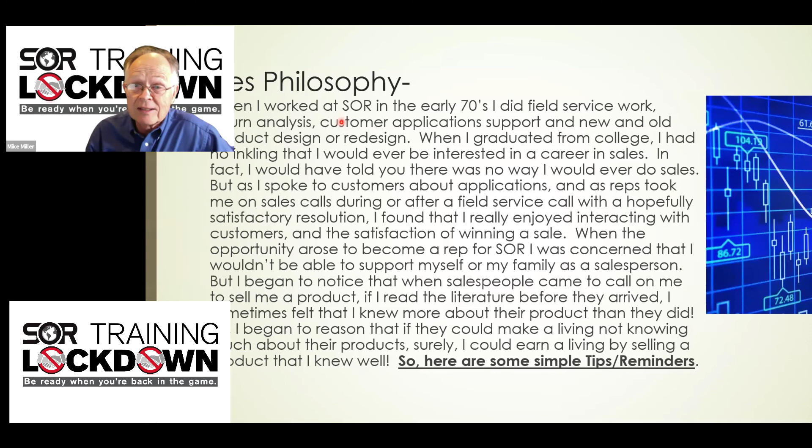So let's see what I did. The first thing I'd like to say is that product confidence is essential. A good technical salesperson knows their product very well, or they know someone else who knows the product really well and who's accessible. Product confidence is as visible to a customer as a forehead tattoo.

It is really obvious. So I gained a hands-on knowledge of these products by reading the literature, practicing with the demos, doing focused selling, sometimes selling the same product for a full week or maybe even a whole month, until I felt like I'd heard every question and could answer every question. I unashamedly copied presentations from product experts, and I learned by helping to fix or solve customers' problems with these products.

So the process of learning a product well and discussing it with customers leads to an additional benefit, which is application knowledge. So knowing where a customer needs a product and touching on these needs or the benefits of using your product in an application where I know we work better than anyone else pretty quickly gives the customer a sense that you are or you could be a valuable asset in their career and that time spent with you is a good investment.

So like a good football coach who has a series of plays that always work, we can begin to look at our customer base and start to filter through opportunities and guide customers to sure wins that help them and make us look good. As this occurs more frequently and over an increasingly broad range of customers, we find another benefit, and that is that our ability to communicate to customers and principals gets better and better.

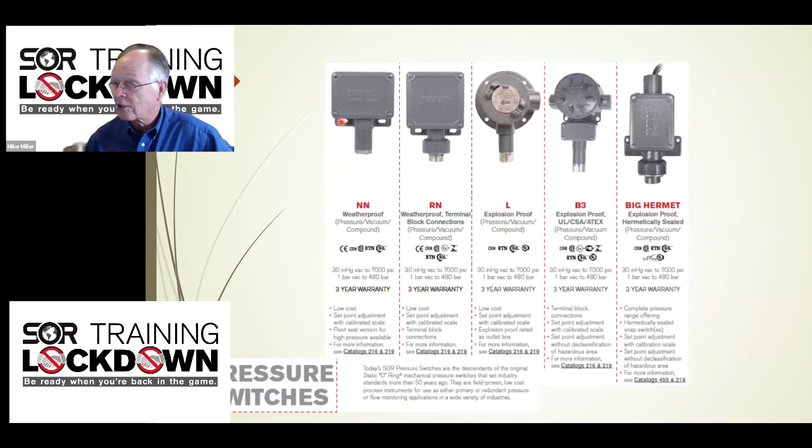We offer weather-tight, explosion-proof, hermetically sealed switches. We offer European-style switches with separate access to set point adjustment without disturbing the electrical enclosures. We offer the mini hermet pressure switches, which are environmentally sealed as well as explosion-proof.

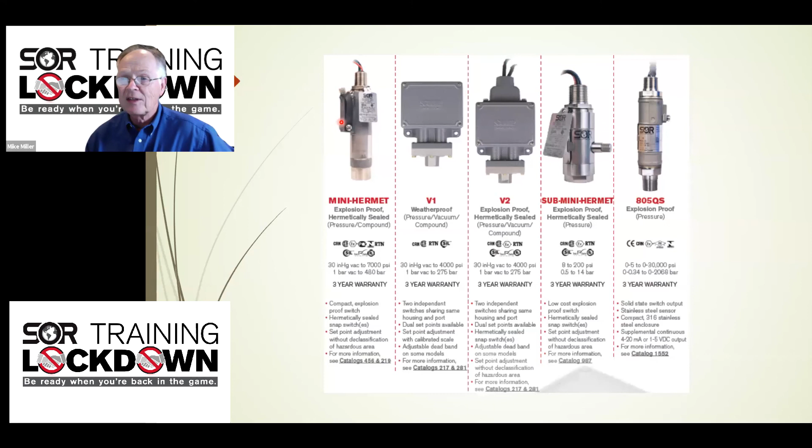We offer dual set point models or models with wide adjustable deadbands in weatherproof and explosion-proof versions. We make the sub-minis for use in areas where you don't have a lot of space. And we make the 805 series solid-state pressure switch products.

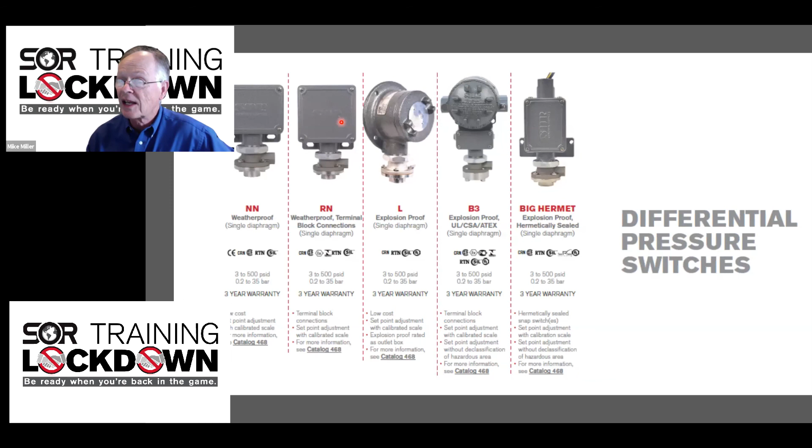We do differential pressure switches with single diaphragms in all the same ranges of configurations. We do the regular pressure switches. And we also do differential pressure switches with dual diaphragms in applications where you need a lot of capability for material compatibility with aggressive media.

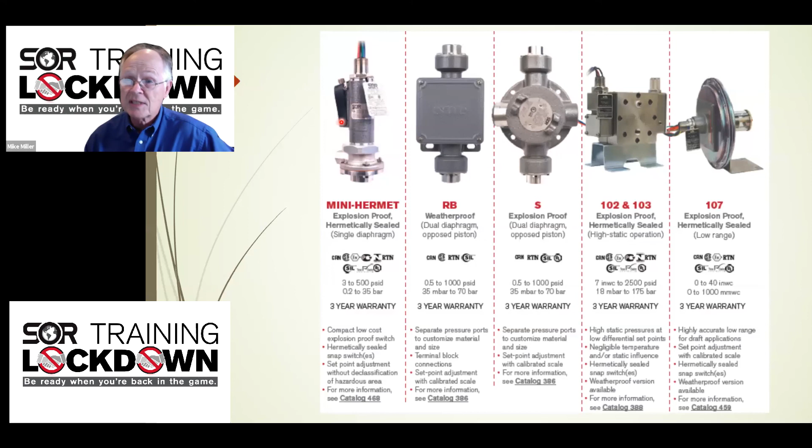The 102 and 103 series switches allow us to detect low differentials at high working pressures. And the 107 switches allow us to detect very low differentials at low working pressures.

The 800, 805, and 815 series transmitters are a very economical and versatile pressure transmitter in an all-stainless steel construction with hermetically sealed innards. The 815s are a very useful combination product that give us the ability to communicate via HART, Modbus, or 4 to 20, and also offer a 1 to 5 volt low power communication opportunity.

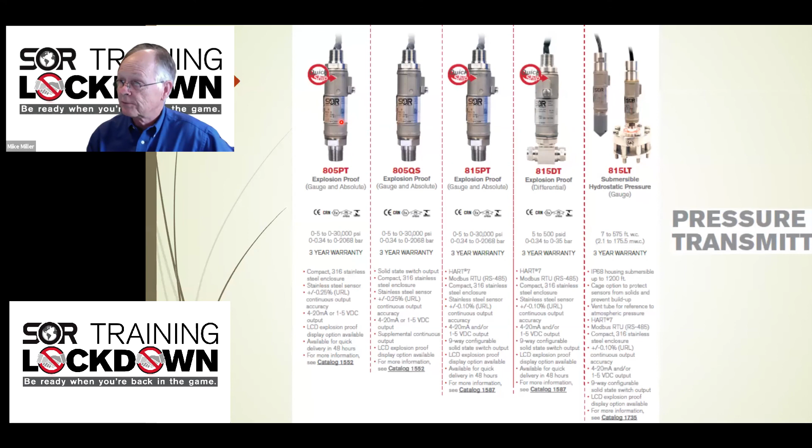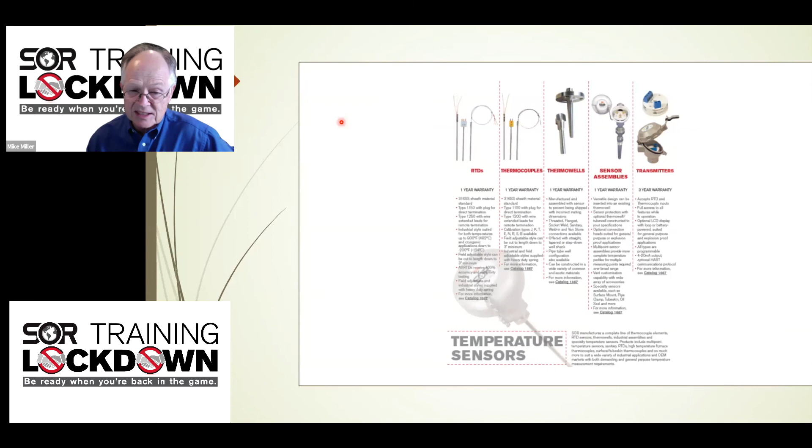And we do differential pressure and submersible pressure. We do temperature switches in the same styles that we do pressure switches. And we do RTDs, thermocouples, thermowells, temperature sensing assemblies, and accessories where electronic temperature measurement is useful.

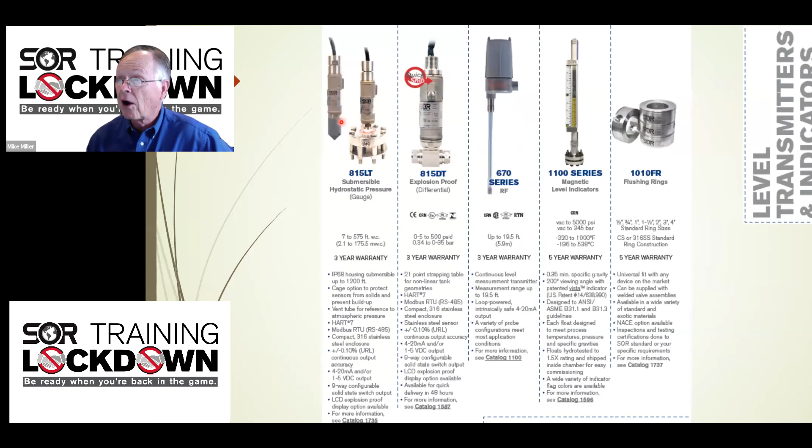We do level measurement using submersible transmitters measuring head pressure. We do electronic differential pressure for level, RF capacitance, magnetically coupled floats, and then we also offer some accessory items like flushing rings. We do mechanical level, doing floats and displacers in flange chambers or sealed chambers, using top-mounted floats and displacers or side-mounted floats.

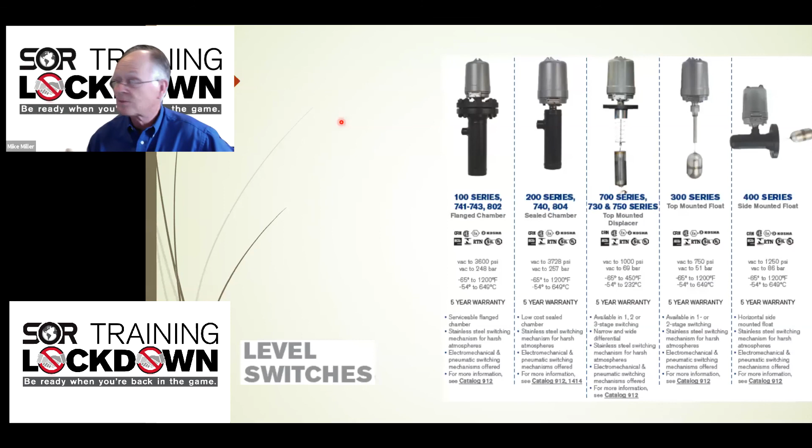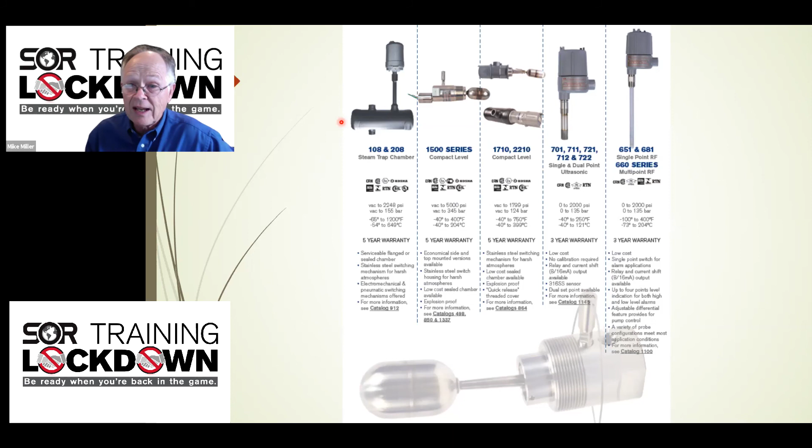We do high-pressure floats, low-cost economical side-mounted floats with reed switches or heavier-duty models with micro switches, and also ultrasonic level switches with single or dual set points, and RF level switches with single or multiple set points.

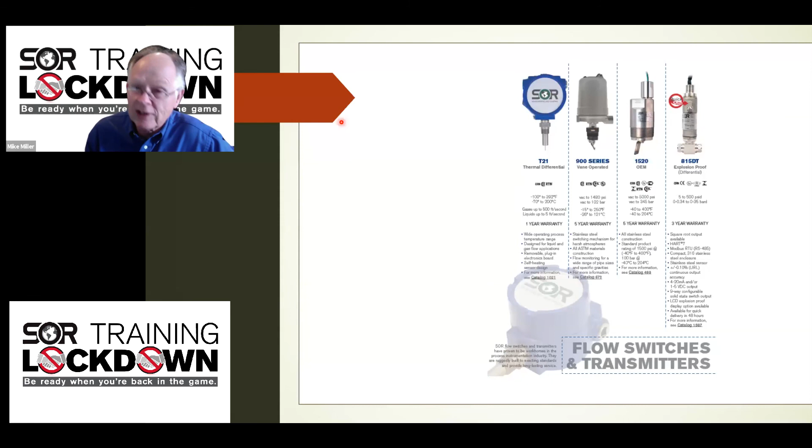SOR is one of the few companies, if not the only company in the US, that still does nuclear qualified pressure and temperature switches, giving you an idea of how robust their manufacturing and documentation process is. And we do flow switches using thermal differential, mechanical paddles, and electronic differential pressure. Additionally, we do sampling systems for a wide variety of sampling applications.

SOR makes switches with approvals from all over the world. We do a lot more approvals than what are shown here. So if you have an application that requires an approval, just ask, and there's a chance that we can handle it.

I've always thought the story behind the origin of SOR was very interesting. As I heard it, Roy Dunlap, one of the founders of SOR, came home from the war and wanted to start a business. So he joined with two other partners to form Mechny Arts, which was an engraving and machine shop. For years, they were a small business doing odd jobs, producing aircraft hot meal boxes, bayonet trays, and casino dice.

Then one year, Ben Brown from Phillips Pipeline came to Mr. Dunlap and told him he had an idea for a better pressure switch, and that if Mechny Arts would build it, Phillips Pipeline would buy it. So Roy agreed to build it, and Static O-Ring Pressure Switch Company, division of Mechny Arts Inc., was formed, and soon it overshadowed Mechny Arts.

Roy traveled all over the country for years displaying the product and explaining its revolutionary design. He eventually hired Ross Johnson as sales manager, who set up a rep organization, and with 35 to 45% commissions, 2-week standard deliveries, and free 24-hour delivery, the product took off. Today, SOR is a multi-million-dollar company with international sales and manufacturing.

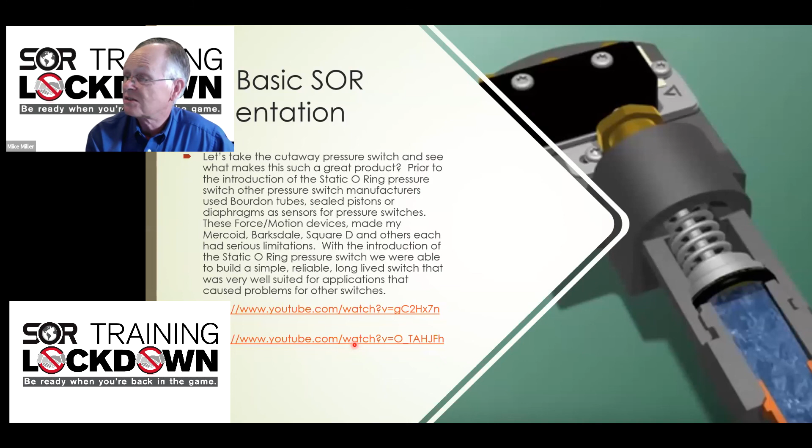I'd recommend, if you're doing presentations, that you utilize SOR's resources, the YouTube videos that explain the cutaway and construction of the switch on the static O-ring principle. You need to be aware of the basics of the switch. We don't have time today to talk about single pole double throw or double pole double throw, NEMA ratings, dead bands, manual resets, and dual set points, but you need to understand those. So you have to study through the catalog and begin to know what those terms mean.

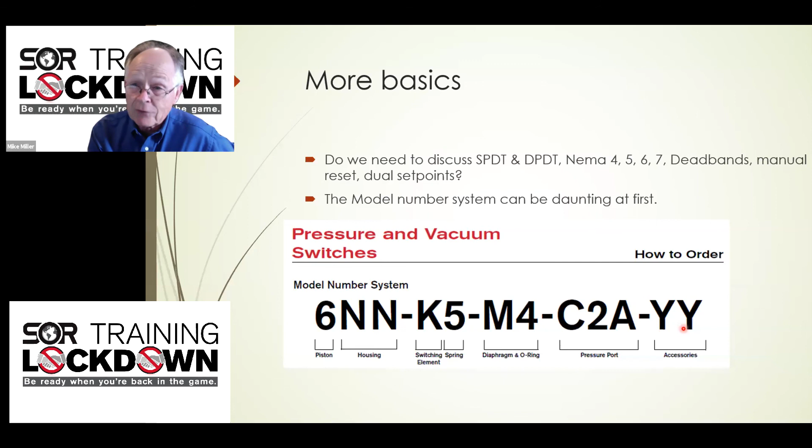The model number system can be daunting at first, but once you understand it, it's great. You can read a model number and understand just by looking at it everything that's in the switch, so you know how the switch has been made. And it means that if you're working with some difficult applications, you can choose every component to make the switch suitable for the service it's going to be used in.

After I've shown the customer the cutaway, usually my second visit is with the mini Hermet pressure switch. It's really a great follow-up demo.

When I was working at SOR, I did their field service and return analysis. I found that of the switches that came back to us, probably 80 to 90% of them didn't fail because of a mechanical problem. They failed because water got into the inside of the switch and corroded it or clogged it up. So the mini Hermet was the switch we built to solve that problem.

If you look at this, you can see there's an O-ring under the pressure port right there. You can't see it here, but there's a gasket under the set point adjustment. And there's an O-ring that sets in this groove right here. So all the entry to the inside of the switch is sealed. The switch is environmentally sealed, and moisture cannot get in or out of it.

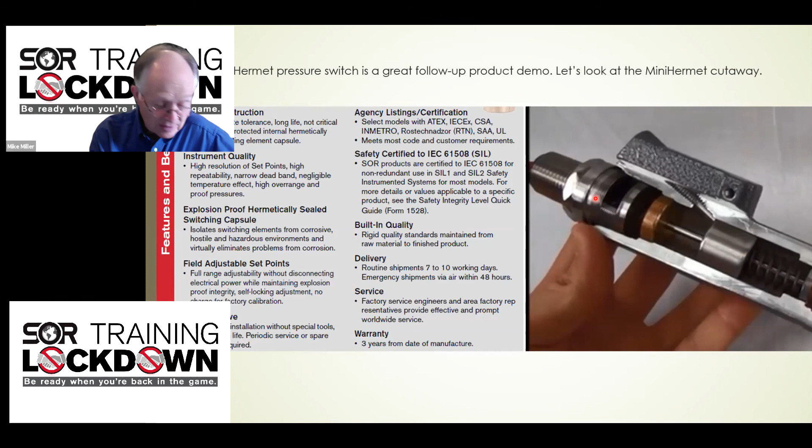Also, if you look at the seals in the switch, we've got the O-ring which seals against the process there. Back here in the capsule, where the hermetically sealed switch is, is the welded metal diaphragm that transfers motion. We've got epoxy potting compound over the micro switch, the glass to metal seal embedded in here, and then epoxy potting compound and the conduit connection to a depth that meets the requirements of the National Electric Code for factory sealed leads. So you've got 5 seals, 1, 2, 3, 4, 5, that prevent migration of any liquids, water, or leaking process fluids into the conduit. So SOR switches are really very rugged and very reliable.

So what are some applications where we excel? For the pipeline industry, we solved a lot of problems. On pumps, the suction pressure at the inlet and the second and third stage inlets all have to be maintained above a minimum pressure in order to maintain a maximum pressure at the discharge. So we have the perfect design for loss of suction pressure detection.

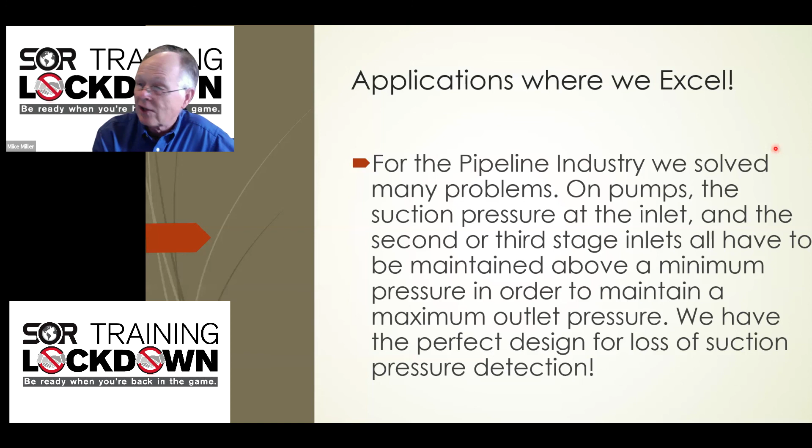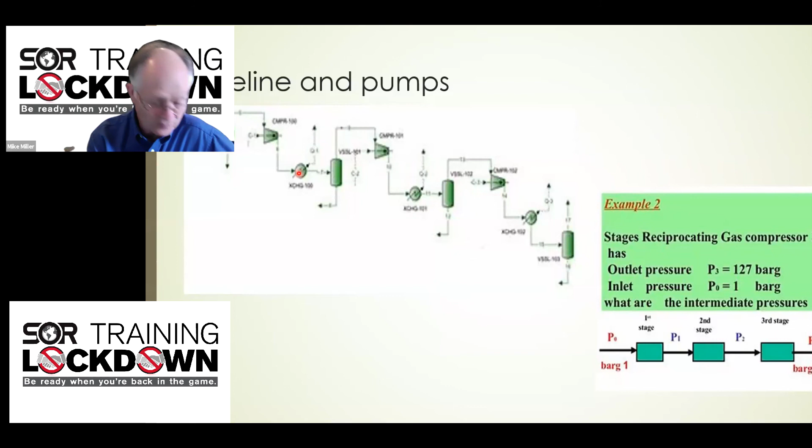So you can see that just on this single compressor, there are a number of applications for SOR. You've got liquid level switches in each of the liquid knockouts. You've got low suction pressure alarms on each of the inlets and high discharge pressure alarms on each of the discharges, and an opportunity for temperature switches or RTDs or thermocouples on each of the heat exchangers. Lots of possibilities there just on a single compressor.

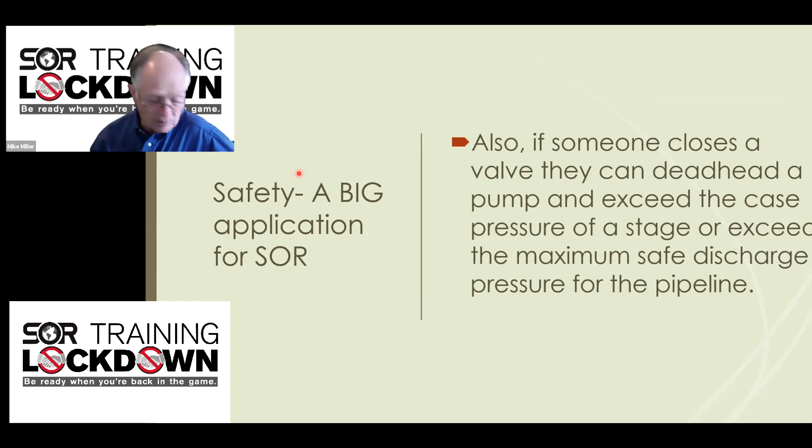So safety is a really big application for SOR. If someone closes the valve, they can deadhead a pump and exceed the case pressure on a stage or exceed the maximum discharge pressure on the pipeline. Additionally, seal pots are really a great application for us.

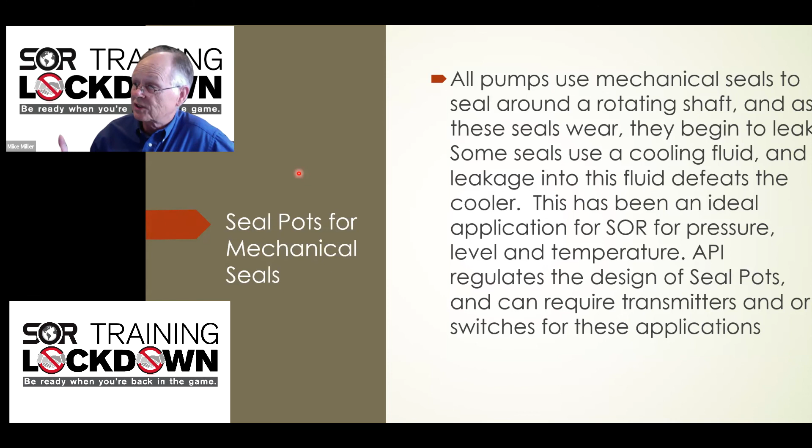And on all pumps of any significant size, customers use mechanical seals to seal around a rotating shaft. As those seals wear, they can begin to leak. Some seals use the cooling fluid, and leakage into this fluid defeats the purpose of the cooler. So this is an ideal application for SOR pressure, level, and temperature switches. API regulates the design of seal pots, and they can require pressure and temperature switches for those pots.

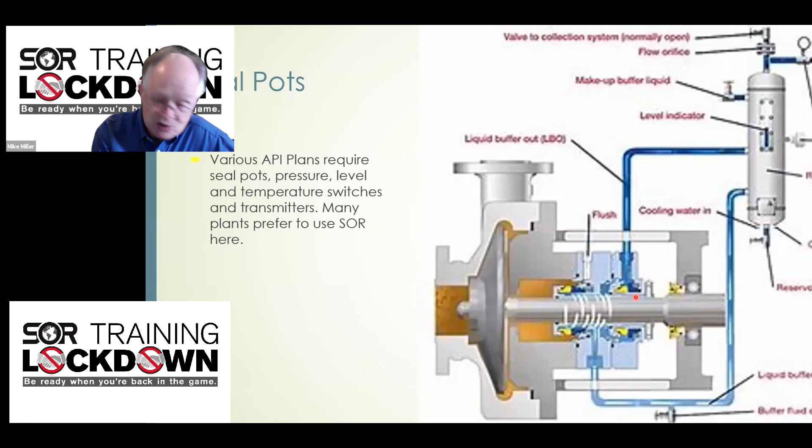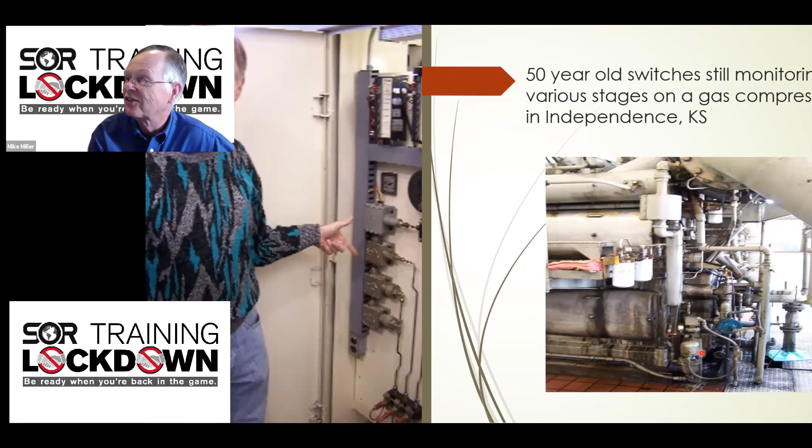We make a very reliable switch. So if loss of pressure detection is an area where we excel, can you think of other applications where we have an important need to sense low pressure? Well, one, of course, is combustion protection.

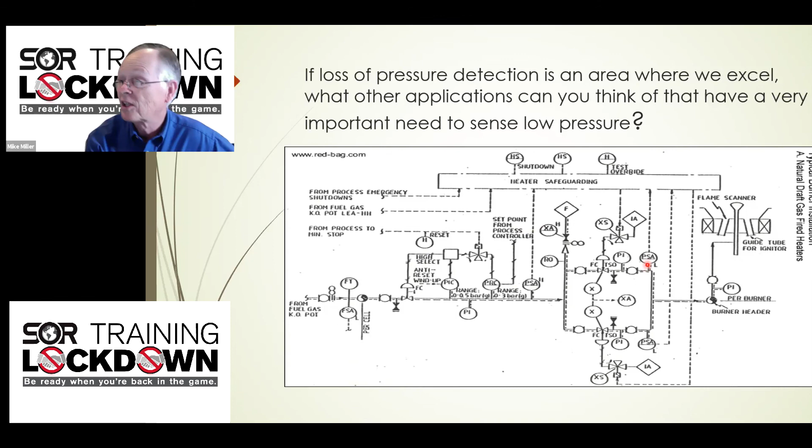As well as probably some temperature alarms, fuel gas burner assemblies are required to have mechanical pressure sensors to detect when fuel gas pressures drop too low to support combustion. Also, on almost every burner of any size, you have to prove that an exhaust fan has run and purged the burner before you attempt to light it or relight it if you have a flame out. And for a lot of the large power burners, you need to prove that a forced draft or induced draft fan is still pushing or pulling air into the firebox to support combustion.

So process heaters, furnaces, boilers, and any other combustion process is always a potential area for a sale. A lot of these areas physically shake from the motors, pumps, fans, and the actual energy of the combustion, so gauges, cheap devices, and forced motion devices often fail and are candidates for upgrades. Here's a typical arrangement where you've got a flow control valve, pressure regulator, the SOR switch for loss of pressure sensing, and a pressure indicator to show you what your gas pressures are.

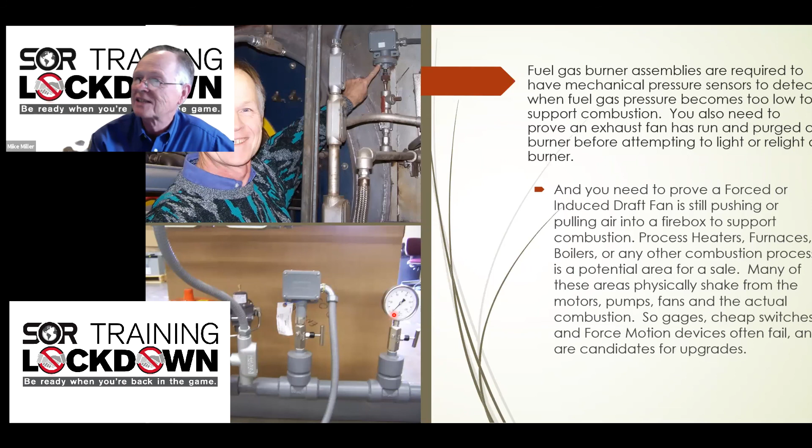Also, how do you know when it's safe to take the radiator cap off your car or open your pressure cooker? Is it when you don't see any more steam? Not really. It'd be a lot safer to have a pressure switch so you can know for sure the pressure is gone. Ask Colonel Sanders, who pressure cooks their chicken, or dye vat operators or impregnation process operators.

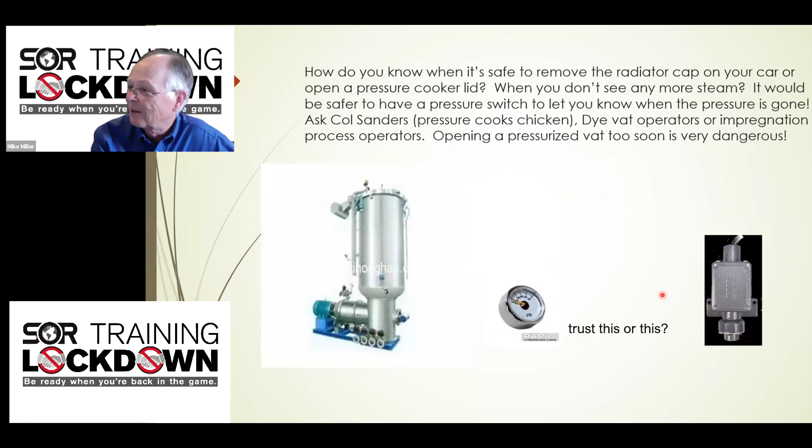Opening a pressurized vat too soon is really dangerous, especially if it's a big one, with a big lid where you've got a lot of area for that pressure to operate. If you open that lid before the pressure is gone, it can cause the fluids inside the vessel to boil again and flash out hot vaporized liquids at you, causing serious potential damage to people and property. So do you want to rely on a $5 pressure switch or a pressure gauge, or an industrial pressure switch? To me, the choice is obvious.

So almost every industrial operation needs to measure or monitor pressure for process control, and more often for safety concerns. If they have a smokestack, they probably need our products.

Pipelines, refineries, power plants, pulp and paper facilities, water and wastewater facilities, plant floor manufacturing, food, chemical, oil and gas producers, research and development, automotive, foundries, minerals, and waste disposal operations—all are targets for us.

Engineering and design firms often need our help to select the best products for their clients. Our part numbers can be kind of daunting at times, but it's because we have the ability to configure a switch to exactly meet the requirements they need for their application. So we can be of a huge benefit to designers by knowing our product and helping them choose what they need.

Temperature switches were developed using a filled system attached to a pressure switch. Our designs are rugged. They carry a lot of the same options that our pressure switches do, and they're made in a lot of the same configurations.

They're less universally used, and that market's really competitive, so I usually sold one or two or three pieces as an add-on to a larger order for pressure switches. We sold them on compressors to sense high interstage temperatures, high bearing race temperatures, on lube oil systems for high temperature alarms and shutdowns, and on heat exchangers for high discharge temperature alarms or shutdowns.

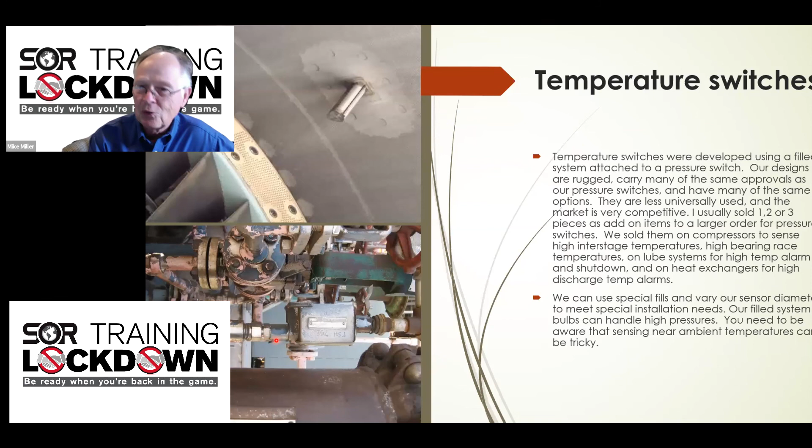We need to remember that sensing near ambient temperatures can be difficult, and we need to watch out for how customers install these things. Here's an example where a customer installed a temperature switch at a 90-degree angle into a small line instead of using a T at the end of the line to insert the bulb into the line for best operation. So we can guide our customers in applications as well as in selections.

But let's talk about mechanical level. In the 1980s, SOR acquired MSW, which was Magnetic Sensing Waves, out of Houston, Texas. The MSW design was a ruggedized copy of the Magnetrol design, and almost all their parts are interchangeable with Magnetrol, who was the market leader at that time.

SOR asked my advice about the acquisition, and luckily they ignored my advice, which was to forget about the sale. As time came to prove, mechanical level sales eventually grew to overshadow all of my other SOR product sales and accounted for about 70% of my total SOR sales.

So if you've known me for very long, you've probably heard me say that for a lot of my products, title never really seems to transfer with the sale. Years after I sell someone a product, I can get a phone call and someone will say, your transmitter doesn't work. And even though you've got that desire to say, well, I thought maybe by now it was your transmitter, we'd often end up helping resolve issues on years old products.

But when we sold an SOR mechanical level switch, we almost never heard from them again. They're wonderful. So fortunately for us, the product is rock solid, and the main competition, Magnetrol, chose to focus on new electronic devices. So we're able to slowly and continuously chip away at their market share.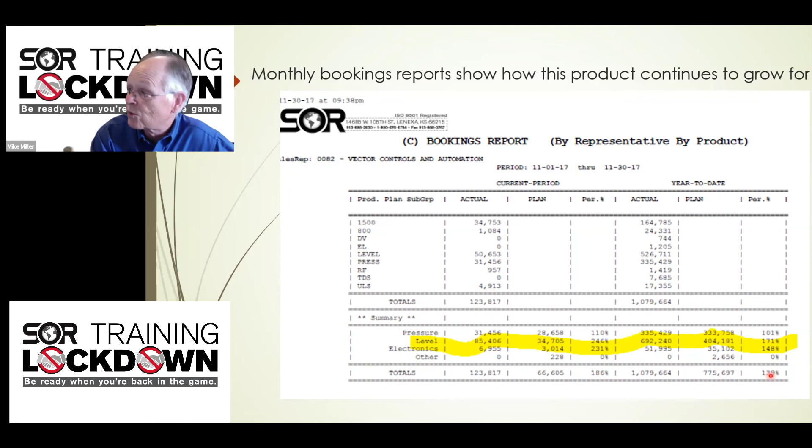We had $700,000 worth of level switches year to date against a target of $404,000, and that put us 171% to plan, and clearly contributed to us being well over target for all of the SOR products. They are really fabulous products.

So let's take a look at this gem in the product line. We do flange chambers with floats or displacers, seal welded chambers with floats or displacers. We do top mounted displacers in single, dual, or triple displacer styles, as well as top mounted floats, side mounted floats, low cost 1500 series floats with options like manual check, using reed switches, and then the heavier duty model is using micro switches where you need more contact capability.

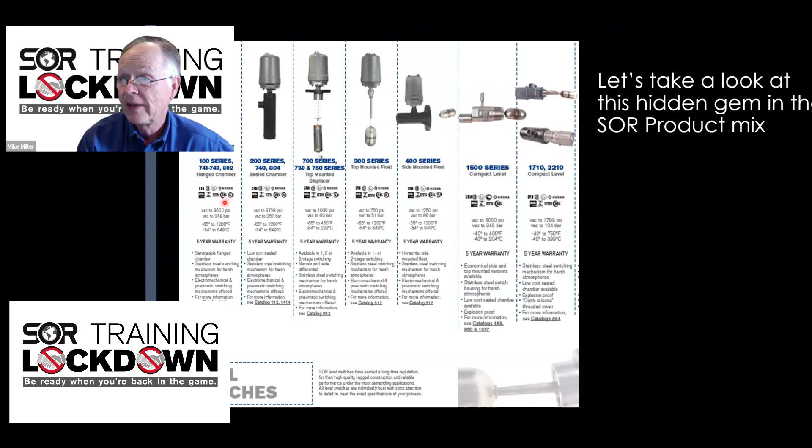All of our switches carry a 5-year warranty and are available with many approvals that keep us appropriate for applications everywhere. So these guys are like dinosaurs in the technology race.

You're probably saying, well, who buys them? Where's the beef? Well, the oil and gas industry loves these things, especially gas plants, where they're commonly used and often requested by end users when OEMs are building new equipment. And the power industry also uses a bunch of them on boiler drums for safeties and shutdowns. So let's talk about applications.

So here's a typical order. When the oil and gas industry is going strong, we could quote and land 3 or 4 orders a month like this. Magnetrol took several weeks to quote these things, and their delivery was 2 or 3 times the length of SOR's delivery. So the applications are for high or low level on suction inlets for compressor protection.

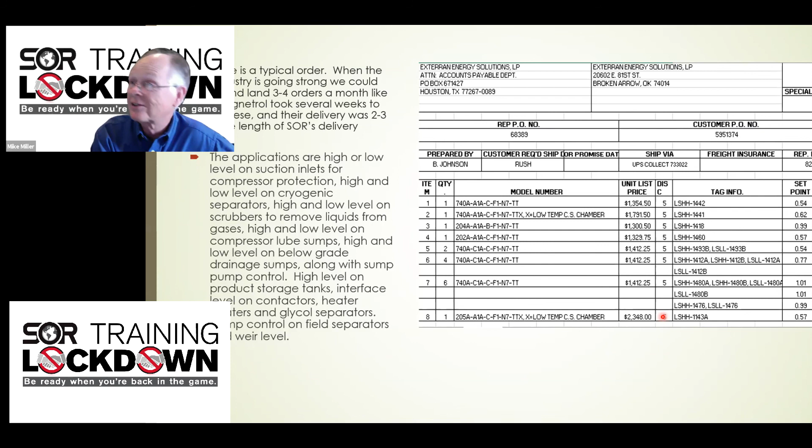So also, if you have OEMs or engineering firms who are involved in the oil and gas production areas, these products really deserve special attention from you. You can use the tips and reminders we've talked about to develop product knowledge and application knowledge, and then begin a program of identifying Magnetrol users.

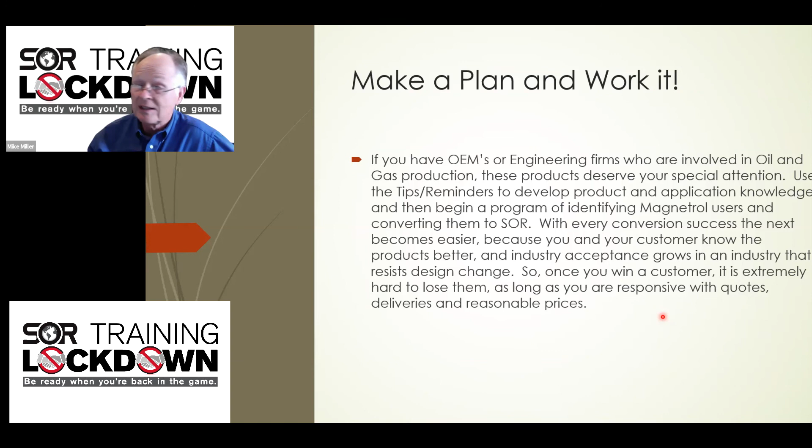And converting them to SOR. With every conversion success, the next one becomes easier, and because you and your customers know the products better, and industry acceptance grows in an industry that really doesn't like to do change, they resist change, you embed yourself. So once you win a customer, it's extremely hard to lose them. And as long as you're responsive with quotes and deliveries and reasonable prices, you're going to keep that customer.

You can see here's an order for 83 of these units at a pretty good price. Here are some documents from the Energy Information Administration looking at the 2020 outlook for oil and gas.

You can see that because of the current state of the industry and COVID, the outlook for oil consumption has gone flat, maybe with a tiny drop off, but for natural gas products, it's still got a slight increase for it.

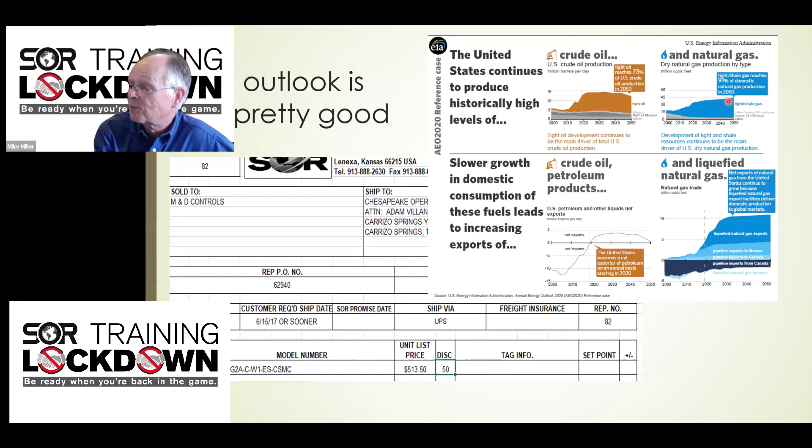And oil consumption may drop a little bit, but the production of liquefied natural gas products and natural gas products will continue to rise. So because there's so much production, there's still a demand to build processing facilities and transportation facilities. So pipelines and processing plants still will be good business for us in the future.

You know, I love power. You remember the tool time with Tim and Binford Tools? It's great. Power is wonderful.

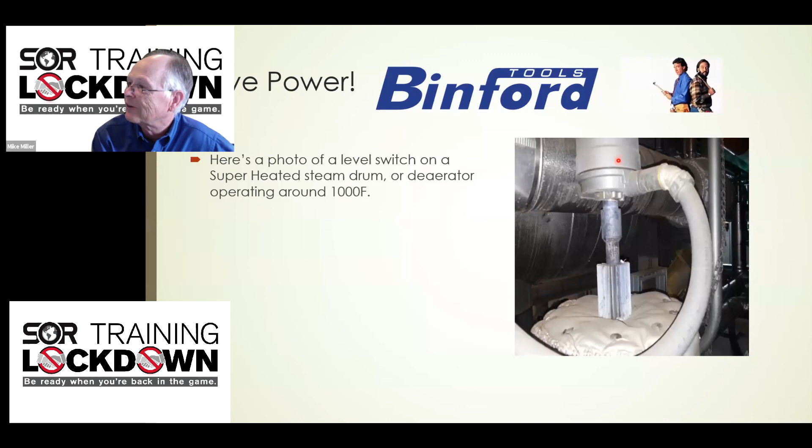So here's a photo of a level switch on a superheated steam drum, or possibly a de-aerator operating about 1,000 degrees. You can see the fins on the extension helping to drop that temperature, and then the extension itself getting up so we keep the temperature at the switching below 800 degrees. But we have the ability to handle 1,000 degree or hotter applications as long as we can keep the temperatures below 800.

So when I'm doing a proposal, or was doing a proposal—I'm retired now—for power plants, I like to point out that we are technically really a better product than the Magnetrol products, which older, sometimes less aware engineering companies would specify.

Our standard warranty for these switches is 5 years, well beyond the startup and delivery requirements for the project. Our high temperature switches are designed to operate at temperatures up to 1,000 degrees. We build using ASME and ANSI B31.1 and .3 standard construction with ASTM grade materials and in-code welding.

It's important to point out that as power companies begin to cut back on the number of crews they use to maintain these plants, they start to circulate crews from plant to plant to do startups and turnarounds. If we can convince them to use the same product in each of the sister plants, it makes those turnarounds and startups go faster and easier for them. So it's important to remind them that in these sister plants they're already using SOR, and it makes good sense to continue using SOR in these future or upgrade plants.

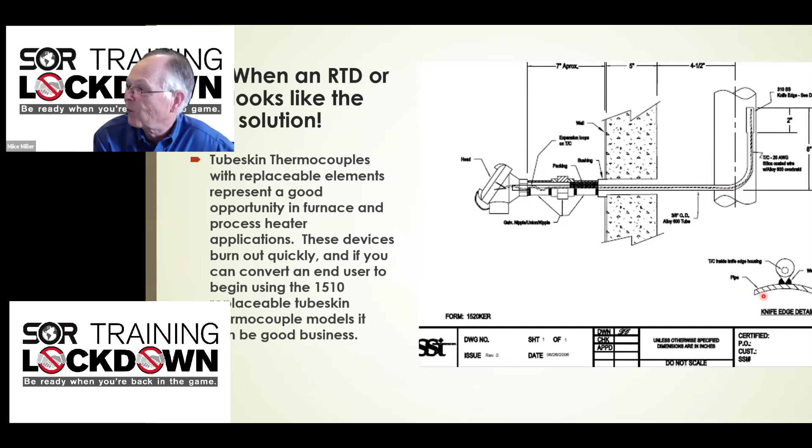But that means when the thermocouple fails, which they often do under these difficult applications, the customer used to have to go back into the heater, shut down, go inside, grind off that weld, and replace the assembly. So with the 1510 replaceable tube skin thermocouple arrangement that SOR makes, we have a model where you can pull that thermocouple out of the sheath, slide the new one in, and continue to operate without having to go in and grind off the welds and replace the thermocouple.

A final word: we need to remember to trust our products. I once had a senior engineer at Phillips 66 ask me if I would trust my life to a pressure switch. I told him if it was an SOR switch, properly applied, with the background I've had with them, I certainly would. And a lot of people do trust their lives to them.

I recall once being at a plant in Oklahoma City where they converted animal fats to hydrogenated food products. I'd sold them some SOR flush diaphragm models for these applications, and they claimed one didn't work. So I went over and checked it, checked the over travel, and told them I couldn't find anything wrong with the switch. The only way I could check it further was to take it off, and I wasn't going to do that because it was indicating pressure over the set point, and it was on a molten fat application.

So the guy I was working with called me a sissy and started to unscrew it against my recommendations. Luckily, I convinced him to wrap it in a rag before he took it off. When he did take it off, it blew off the line, and he only got minor burns. But the last time I saw him, he was running through the control room cursing at the operators on his way to get medical treatment.

So our products really do fulfill important functions, and if we do our jobs right, we're helping protect people, property, and processes. I always tried to be the best and most professional salesperson I could be, and I think that if we help our customers achieve a better life using our products, they will habitually utilize us as their partners in business.